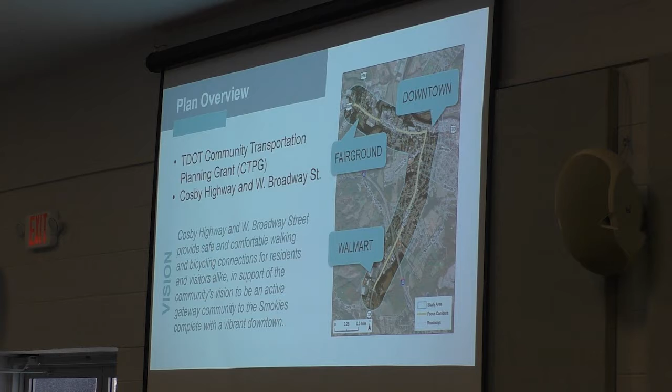When we say complete streets, that pretty much means providing the right street in the right place. Perhaps in some contexts it's all automobile oriented, but in other contexts it may be appropriate to provide a shared use path accommodation. This is an example of a state route facility right next to a library with a shared use path. So again, complete streets just means providing the right infrastructure for the folks using the transportation network.

So some of the major outcomes and deliverables from this plan, like Gary mentioned, this plan is an important document to go after different TDOT as well as recreational grants to construct some of the recommended sidewalks and greenways that we have in the plan. The big important outcome is the plan to show TDOT that the community has put forth thought and analysis into some of these plan connections.

We're also going to be providing cross-section design guidelines, like you can see there, for different segments of these corridors, and identify the different design measures of these facilities and what those will look like.

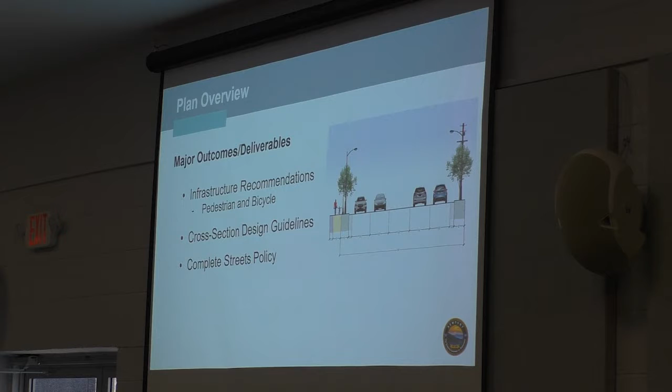We also developed a complete streets draft policy, and that's basically signaling that the community's committed to providing safe and comfortable walking and biking facilities.

So like I mentioned, we did several existing conditions analyses. Rachel and I were here for a field review, so we drove all over the community, specifically within our study area. We also looked at traffic volumes using TDOT transportation counts. They have a number of count stations all over the transportation network, so we're able to look at historic traffic volumes, as well as future traffic volumes all the way into 2040, just to see what kind of traffic pressure is going to be put onto the network.

We also looked at the safety analyses, which was basically evaluating crash history, both for vehicles, but as well as specifically pedestrians and bicyclists with vehicles. And then finally, the field review, like I mentioned.

The map here on the right is just an example of one of the analyses that we did, based on the infrastructure that is currently out there. This is called a bicycle and pedestrian level of traffic stress. So when you're along Cosby Highway, it feels somewhat uncomfortable just because of the amount of traffic and the speed of traffic. This level of traffic stress is a methodology for scoring the roadway network, as well as if there are sidewalks, to see where those locations are that we should hone in on that might be especially uncomfortable or unsafe for walking or bicycling. That's just an example to show you some of our analyses.

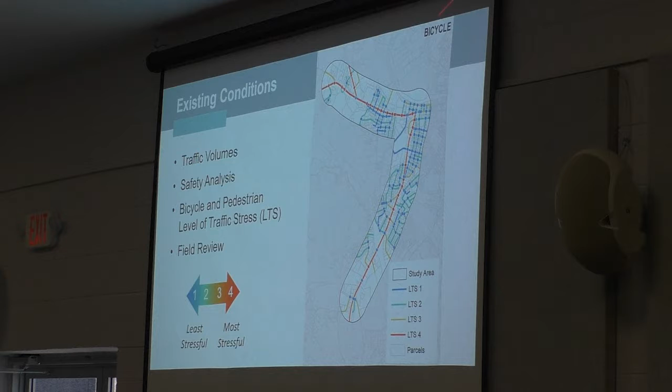Furthermore, we did it for the bicyclist perspective as well. They can handle a little bit more traffic stress, if you will, because it is technically a vehicle, and they are allowed to ride in the lane. But again, this is just to show you the real big takeaway here, which is that the major corridors are, in fact, stressful and uncomfortable currently for most people that are walking and bicycling.

In terms of our public engagement, like I mentioned, we had a great turnout back in, I guess it was April in the spring. We had both a Survey Monkey as well as a map where you could go online and provide comments on the map, so we had an excellent turnout for that. 135 surveys were completed, so we had great participation for a community of this size. We also had a virtual open house as well, which consisted of a presentation and open discussion, and we had some great discussion during that event as well.

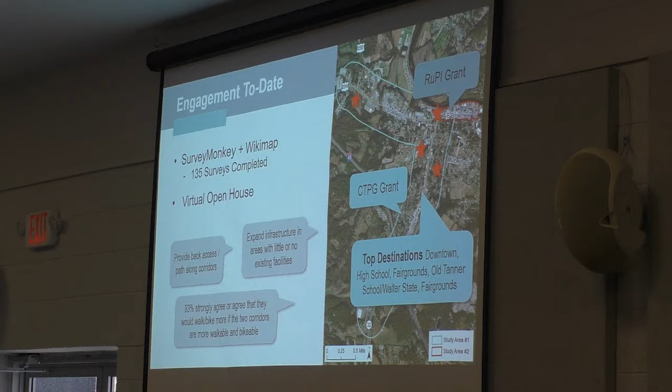Really the key takeaway on this one is the top destinations, that was an important question we asked folks, to rank the destinations in terms of where they would like to walk or bike or currently do. And those are the high school, downtown, the fairgrounds, the old Tanner School, as well as Walters State Community College. Okay, so now I'm going to quickly go through some of these recommendations.

Basically what we looked at and what ultimately we are providing are these future bicycle and pedestrian networks, these connections that, like Gary mentioned, is something to work towards over the long term. So the types of facilities that we were looking at are sidewalks, of course, and then shared use paths. We have some examples here when it's within a roadway right-of-way, that's called a side path. So we looked at some of those types of facilities for the corridor.

And then greenways, of course, those go more off of highway corridors, for example, along a stream.

And then finally, the shared streets. When I say shared streets, that basically means it might warrant additional pavement markings and/or signage, as well as some traffic calming measures. These are typically only on low volume streets, as they already are. However, you do want to make sure that vehicles traveling on it are going at an appropriate speed, so just know that as we talk through this.

Okay, at a high level, you all have a handout in front of you showing these draft networks. TDOT is currently looking at this as you all are as well. We don't anticipate any changes to the recommendations based on our discussions with some of the TDOT planners, but just know that they are taking a look at it currently.

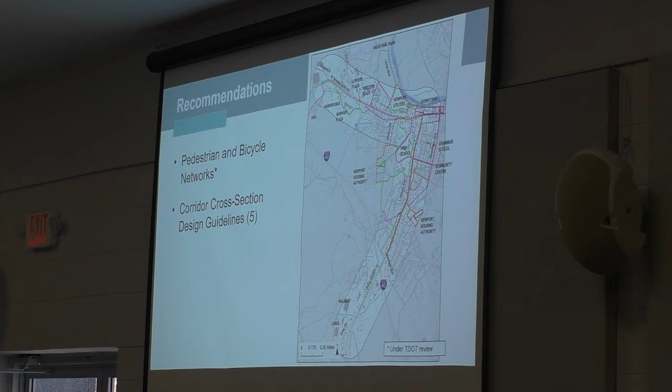And then finally, we've also developed these corridor cross-sections, again, for design guideline purposes.

Okay, segment 1. We have 5 segments that I'm going to quickly go through. This is up by Fenwood Drive. Let's see... there we go. So this is for West Broadway.

Okay, moving on towards downtown, this is segment 2. And I should go ahead and note on this one, the shared street, there's a great alternative on this parallel facility to provide folks a more comfortable walking environment that's outside of the high traffic corridor. So we certainly have an opportunity for a shared street on that parallel facility.

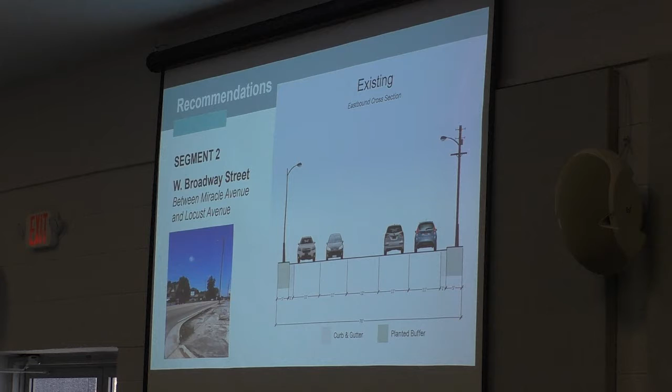But here it is existing today, currently without infrastructure. And then the proposed, we're proposing that the sidewalk be on the north side of the corridor here. And again, for the connection on the south side, that would basically be that shared street alternative connection. There's some great through access to those businesses located along the corridor from that backside, so it's very helpful.

Okay, third segment, moving on into downtown further. This is almost at the intersection with Cosby Highway. As you all may know, you are getting some future sidewalks that'll be coming in soon to connect along West Broadway Street to Hedrick.

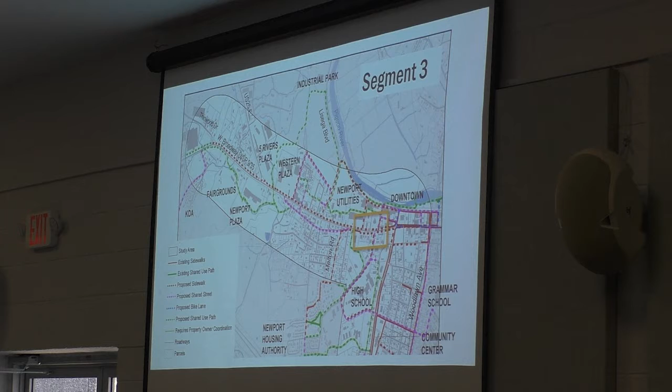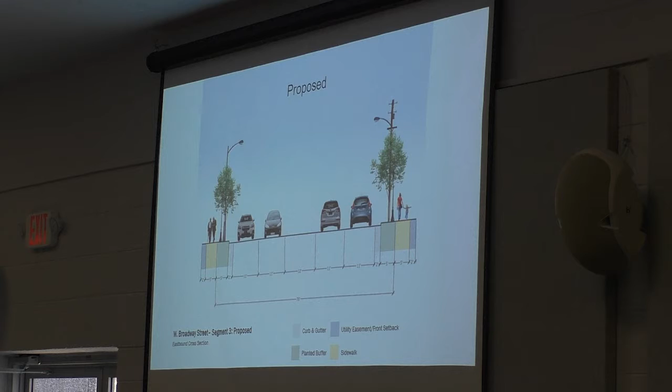All right, segment 4 focuses on Cosby Highway. This is the northern portion. You can see we've got some shared use paths going to the north, making sure, again, we're looking at those destinations that folks ranked for us in terms of top destinations. So we're really looking to get folks to the school and the community theater at the high school, as well as the farmers market and the old Tanner School.

But here we have an additional opportunity to take a potential pathway, and of course, these pathways involve a lot of coordination and work with the individual property owners, so I wanted to note that. But there is a great opportunity here with the new little park that the city has, which is very beautiful with the backdrop of the mountains. There's an opportunity, since the roadway already has sidewalk, to take that path on the backside and provide a connection to that park.

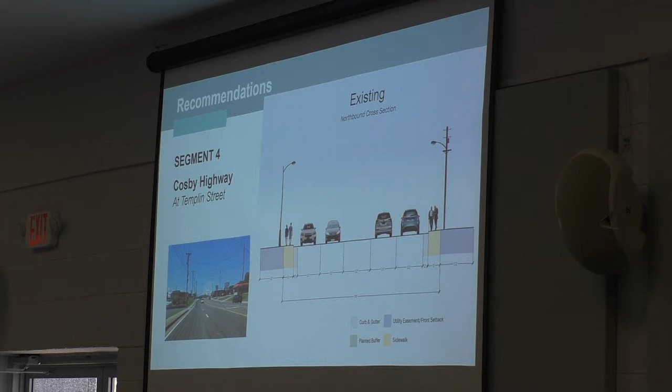Okay, segment 4, that's what it looks like existing today. There's sidewalk on both sides currently. And then the proposed: we would recommend that on the west side, that sidewalk be widened to a 10-foot width, and that's basically to accommodate both cyclists and pedestrians with bidirectional traffic.

Okay, our final segment is up the southern end of Cosby Highway, north of Epley Road. We envision continuing that shared use path connection across the interstate, the interchange, and then on down connecting to those hotels, some of the restaurants there.

And we tried to bring the connection all the way down to Lowe's. However, where the right-of-way opens up, there's a lot of topography and grading and stormwater infrastructure that would be needed. Given that Walmart has a great little cross-property access there, if you could just get folks safely to that Walmart parcel, then folks can certainly walk over to the other destinations. I believe there's a doctor's office as well as the Lowe's over there.

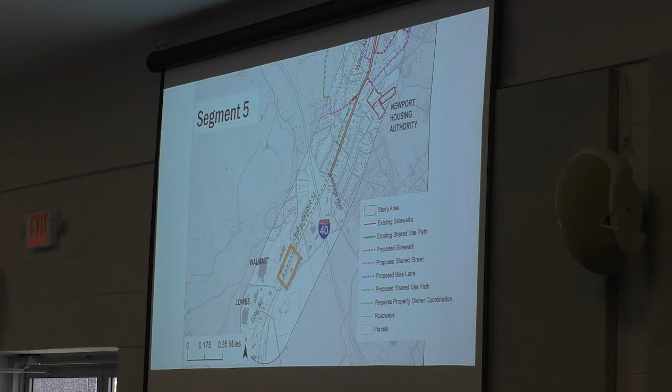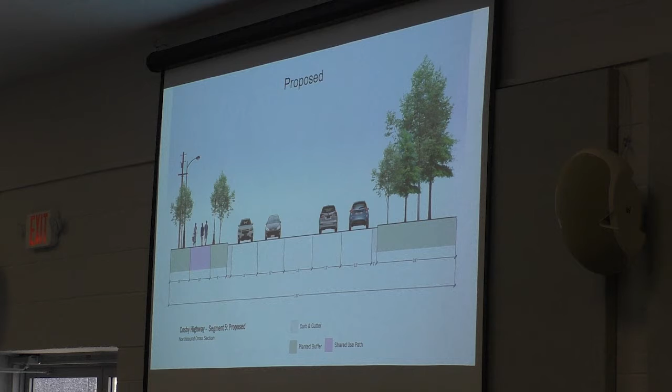Okay, and this is what the proposed cross-section would look like. Again, this is just showing that shared use path on the west side of the highway. And we certainly looked at a lot of other connections off the corridor as well.

Specifically, downtown was one of the top destinations that folks wanted to be able to walk and bike to. We really tried to get creative in terms of building on the recommendations you have, but also the built environment. I know there's a lot of love for these buildings, they're just beautiful old buildings, so we wanted to show you an idea of what it could look like.

Some of our project next steps: score the projects using a prioritization strategy rooted in data. It doesn't set the project schedule in stone, but gives you an idea of the priority connections based on the goals outlined for this study. So whether it's connectivity to schools, for example, if the project is within a quarter mile of a school, it would receive points. That's basically how we'll score the projects to give you an idea on which ones would be most beneficial to move forward on in the near term.